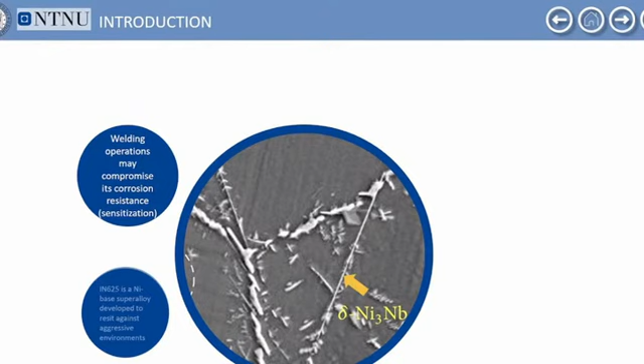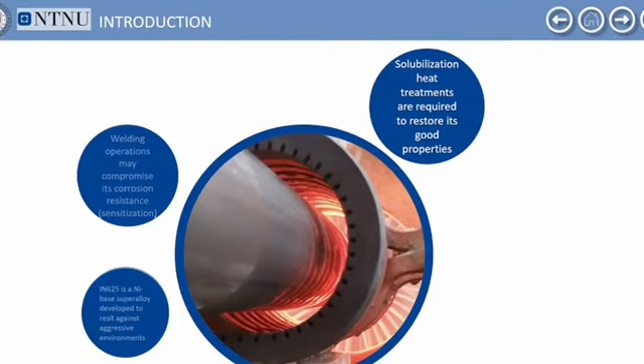In particular, using fusion welding, we are going to destroy the optimal microstructure and induce the precipitation of secondary phases, such as delta phases in this case, that are detrimental for the corrosion properties of the welded joints. This phenomenon is called sensitization, as in stainless steel, for example. So it is mandatory to perform post-welding heat treatments in order to restore both the mechanical and corrosion properties of this alloy.

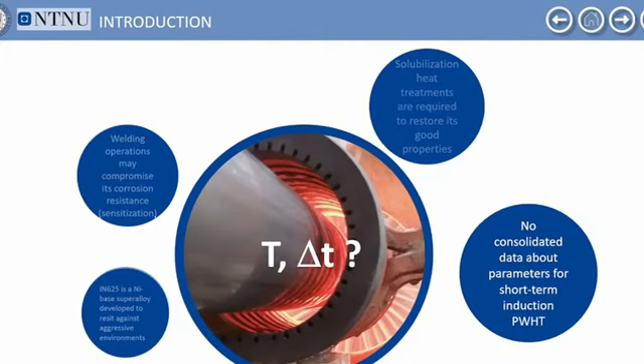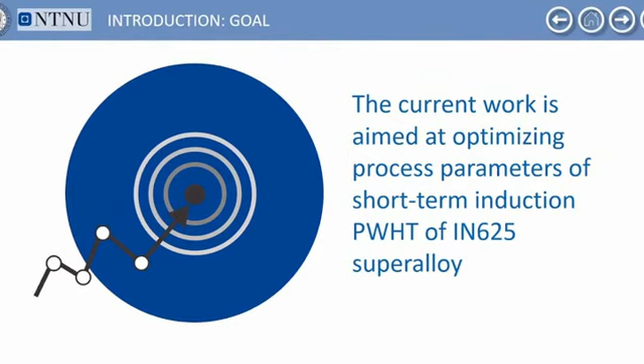Unfortunately, no consolidated data are available in the literature and in the industry regarding the best process parameters, in particular the temperature and the holding time. So the goal of this work was to study the effects of the temperature in the post-welding heat treatments, to study the influence of such parameters on corrosion properties, in general, to find the best process parameters in order to restore corrosion properties of these welded joints.

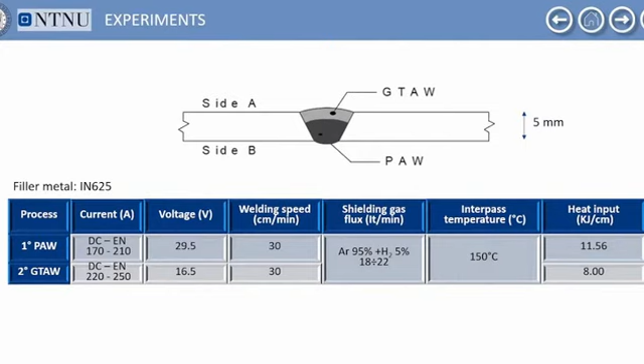After welding, we performed post-welding heat treatments using two different temperatures, 980 degrees and 1050 degrees, and we kept the holding time constant and equal to 20 minutes. We also performed corrosion tests according to ASTM G28, method A, and then we carried out metallographic investigation in the three most important zones of the joints, the fusion zone, the heat affected zone, and the parent metal, using optical microscope, scanning electron microscope with EDS in order to investigate the redistribution of the key elements in the welded joints.

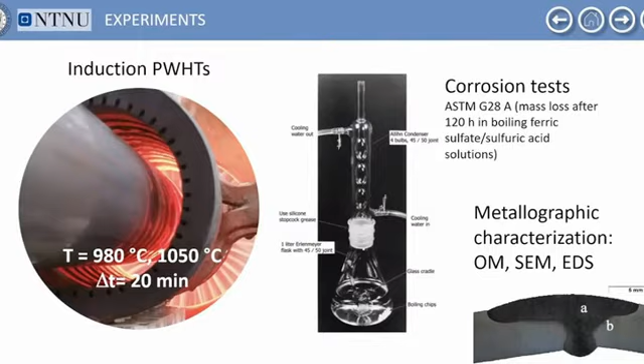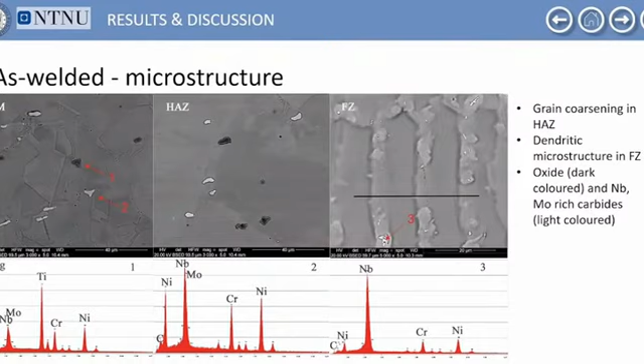These are the results in terms of SEM micrographs of the as-welded joints. We observe a grain coarsening in the heat affected zone as expected, and a dendritic microstructure in the fusion zone. We also found different precipitates. The dark colored precipitates were identified as oxides. On the other hand, the light colored precipitates were identified as carbides enriched in niobium and molybdenum.

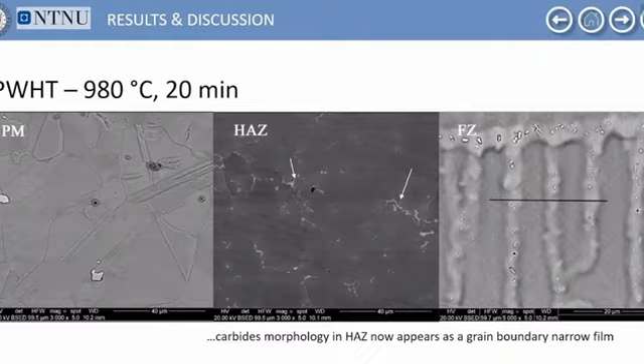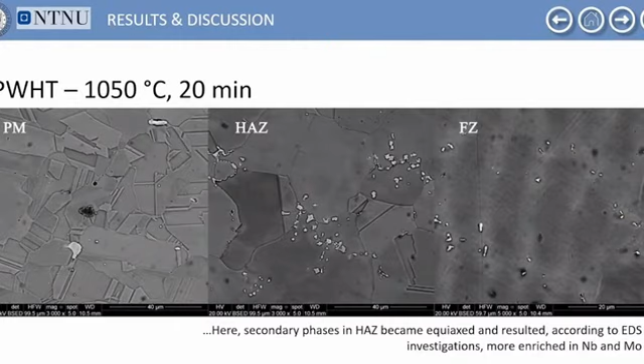Moving to the microstructure of the post-weld heat-treated joint at 980 degrees, we observe more or less the same microstructure of the welded joint with a variation in the morphology of the carbides that now appear as grain boundary film, as you can see in the heat affected zone micrograph. Moving to the post-weld heat-treated joint at 1050 degrees, we observe the same microstructure as in the previous case, but now the carbides return to be equiaxed in shape.

About the redistribution of the most important elements for the corrosion resistance, we performed EDS line scans through the secondary dendrite arm spacing, and we found a segregation of niobium and molybdenum in the interdendritic zones, and in the opposite way, nickel was depleted in this zone. This is the distribution of the elements in the as-welded joint.

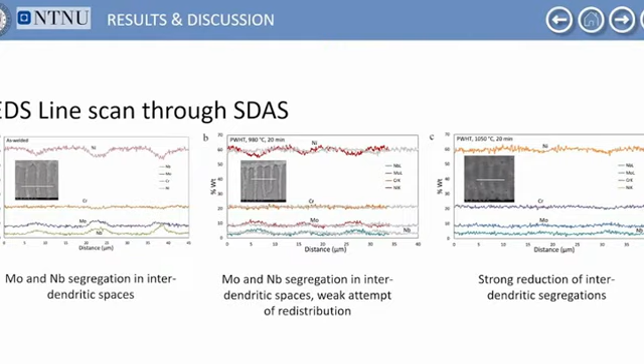Moving to the post-weld heat-treated joint at 980 degrees, we observe a little reduction of such segregation, so a partial redistribution. And moving to the samples heat-treated at 1050 degrees, we observe a homogeneous distribution of the key elements.

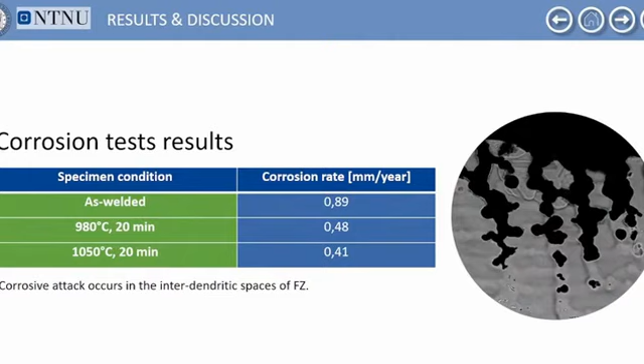So these are the results of corrosion tests. In particular, we can observe that the post-weld heat-treated joints behave better than the as-welded joints. So post-weld heat treatments were effective in order to restore more or less the corrosion resistance of these alloys, and the best results are obtained with the highest temperature, 1050 degrees. We also observe that the corrosion attack occurs in the interdendritic zone of the fusion zone.

About the discussion, we have postulated that in the interdendritic zone we have a precipitation of secondary phases, delta phase precipitates with a nanometric size. This was also observed in literature, and this is the problem of the sensitization of as-welded joints.

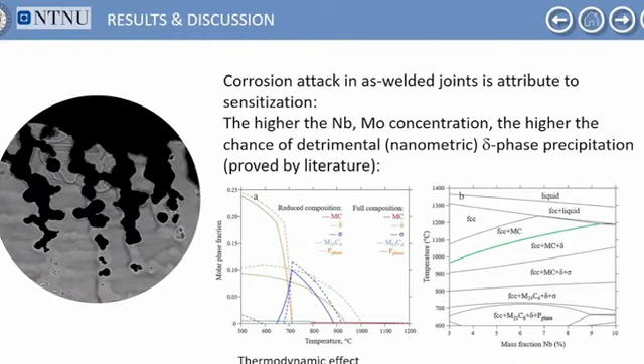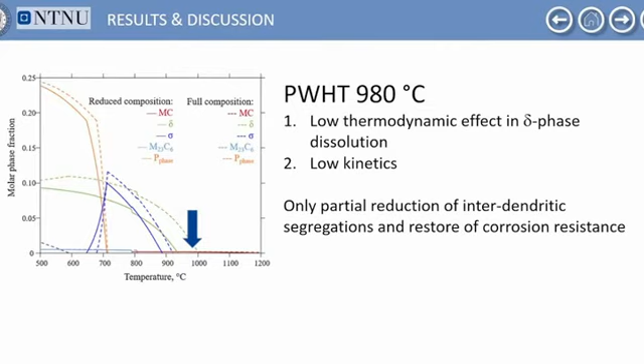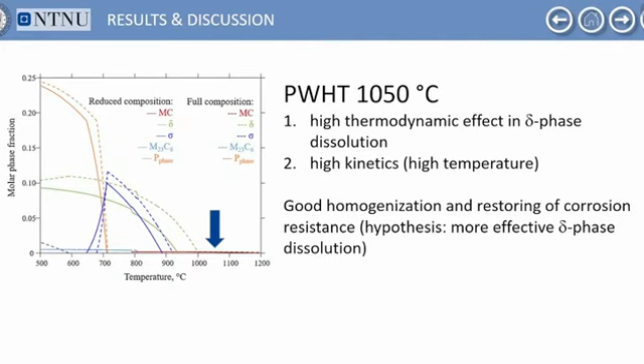Using a post-weld heat treatment, we are able to redistribute such elements. We have a partial solubilization of delta phase, but at 980 degrees, only a partial solubilization. On the other hand, with the highest temperature, we can reach the best result, because we postulate that we have a complete solubilization of secondary phases, so a complete restoring of corrosion resistance of this alloy. This is for both a kinetic reason and a thermodynamic reason.